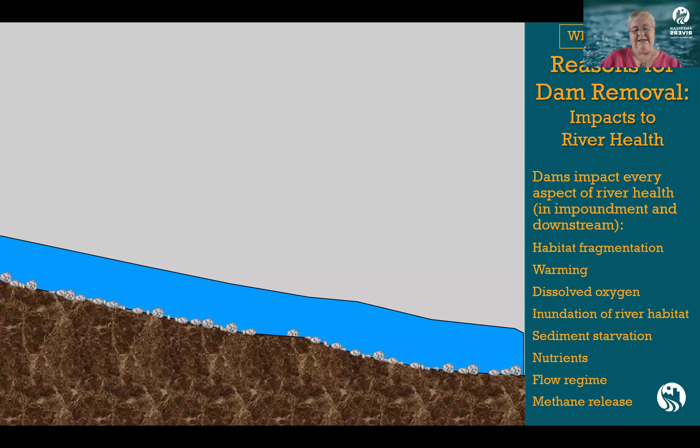But let's just say we're out in nature and everything is untouched and unspoiled. It's in pristine condition. And so we've got a river and it's got healthy substrate on the bottom and everything, natural flow. You've got seasonal variations in flow that provide the triggers for the species as needed. And there's a nice population of native fish, and they're really happy here in this watershed. And then somebody gets the big idea that they need water, so they build a low-head dam.

And low-head dams, as you know, only raise the water level. And primarily they raise the water level to flood something, either a mill race or an intake for water supply or industrial water or something along those lines. So the dam is built and now there's a barrier in the river and the fish can't move upstream. So we have a fish passage issue.

And then the fish start to notice that things are changing because it's what I call the kiddie pool effect. That water sits out in the sunshine and it doesn't have the current flowing. It's slowed down. The thermal profile changes. And so the river starts getting very warm.

And that kind of is a disadvantage for those native species. And then you get, of course, a sediment wedge that starts piling up behind that low head dam because you've interrupted the flow. And then you get invasive species that start to grow because that condition now favors that. And just want to point out this looks suspiciously like corn.

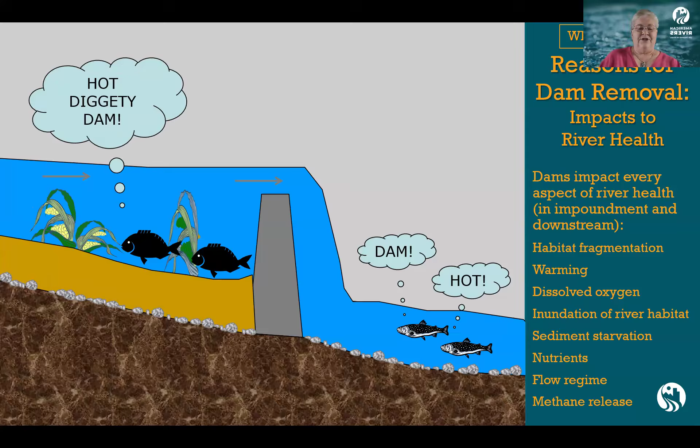And then we have invasive fish that come in, and they are super happy because what used to be a river now is an environment that favors the invasive species over the natives, excuse me. And so if you look on the right-hand side, there's an entire list of all the changes that occur in a river simply because somebody builds a low-head dam. And these are the issues that we're trying to solve as we look at removing low-head dams.

So, when we're starting to make a case for removing a dam, either with a community, a dam owner, regulatory agencies, whoever we're working with, the first thing we have to look at is fish passage. So, migratory fish, of course, we've had a lot of loss of population. So it's a problem, but also for non-migratory or what we call river resident species. And brook trout is called out here, but small-bodied fish that are freshwater mussel hosts are specifically at risk for fish passage issues at dams. And so we're finding that we're losing freshwater species at an accelerated rate, even faster than saltwater species.

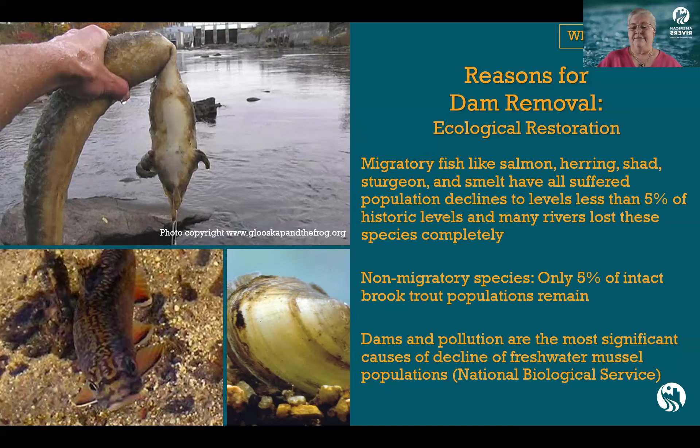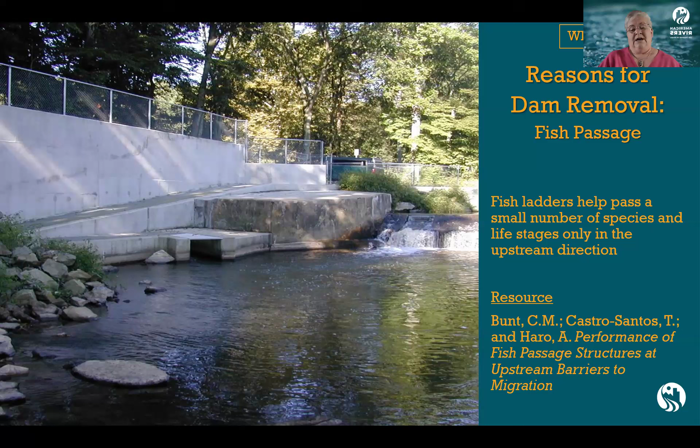So let's just solve the problem by putting a fish ladder on our dam, right? That'll take care of everything. Except fish ladders are rather expensive to build. They don't target all species and all life cycles. So they may pass adult fish, but they won't pass juvenile fish. And so far, there's been no fish ladder engineered that can pass the small-bodied fish that host freshwater mussels. There's been a lot of effort to move those fish in various countries in the world, and it's just not effective. So that's not a great solution for most species.

Now let's, oh, excuse me, I have just messed up because I'm trying to move this so I can read my slide. There we go. All right, I've got y'all moved to the other side of my screen.

So, American Rivers has found with the first removal of the Edwards Dam in 1999 on the Kennebec River in Maine that once you remove the barrier that doesn't belong there, a river can start restoring itself. And so we commonly say that there's no faster or more effective way to bring a river back to life than removing a dam. And of course, the more dams on a river that exist, if you can get 100% habitat connectivity, reconnection again, then you're in even better shape.

Another reason for removing dams is just the age of the dam. So the dams are old, they aren't serving a purpose that they were built to originally provide. I'll talk a little bit more about this in a little bit. But yeah, these dams have been around forever. They provided water to a mill, in some cases to a water supply. I see a lot of water supply dams in Pennsylvania where I work that the dams previously provided drinking water, but because of the age of the treatment works, the regulatory agency no longer allows that dam to be used. So I've been taking out old water supply dams quite a bit recently.

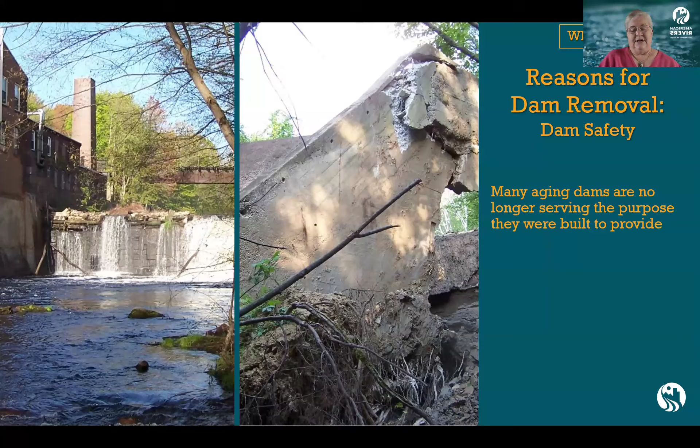We have a dam in Pennsylvania where 31 people have drowned. It's the Dock Street Dam, and Ty and I are working on helping the community understand the benefits of getting that dam out. But a lot of people don't realize that dams are dangerous. They think, oh, this is a waterfall, this is a play feature. And 1,400 people have died at low-head dams in the United States.

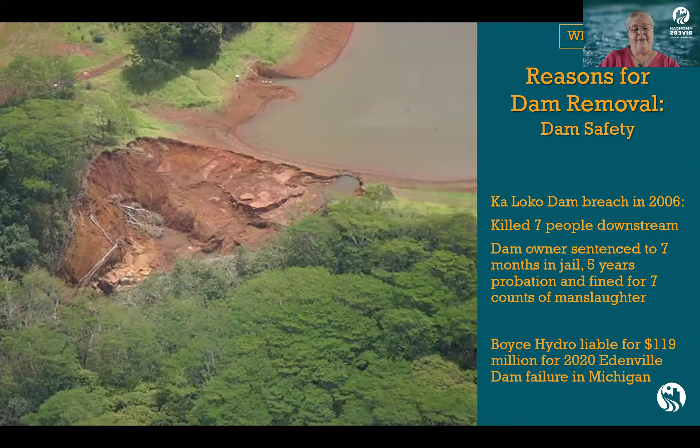Environmental justice is also another motivating factor, and by now you've all heard the story of the Klamath Dam that took more than 20 years to get four dams out in the upper part of the watershed. And the main reason was for food security and cultural values for the tribes that depended on the river. And of course, last year in 2025, teenagers from the indigenous tribes in the area paddled for the first time ever 310 miles on the Klamath River with those four dams out. So this is just a huge success story about dam removal for environmental justice.

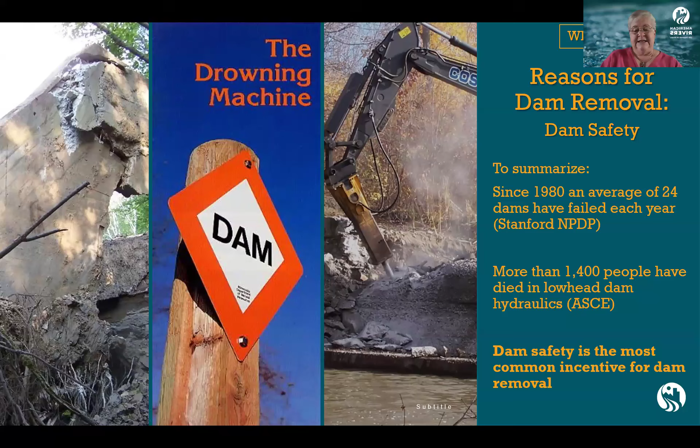So, just summarizing things, we've seen a lot of deaths at low head dams. We've had a lot of failures, an average of 24 each year. And the most common reason to get a dam out, excuse me, I apologize, the overall dam safety. If a dam is out of compliance and an owner has to make the choice between removing the dam or repairing it, that dam safety becomes the most common incentive for removing it.

So a little bit about dams in Pennsylvania. This is from aquaticbarriers.org. I just got the numbers back. We've just tallied our dam removals. We keep an interactive dam removal map on our website, americanrivers.org. Pennsylvania is the number one dam removing state in the nation. We've removed 432 dams as of 2025, and this is approaching 15% of the dams that were on the dam safety database, which we're finding out is not complete. Ty and I found a couple of dams just recently that were not in the database, so we know that there are some shortcomings in the record keeping.

So currently, that leaves us with about 2,800 dams that are remaining in the database, and of those, 75% don't meet their purpose. Only 5% of the dams that remain provide navigation or flood control. So a lot of people will say, oh, well, why would you want to take out this dam? It protects me from flooding. Well, that's not necessarily true.

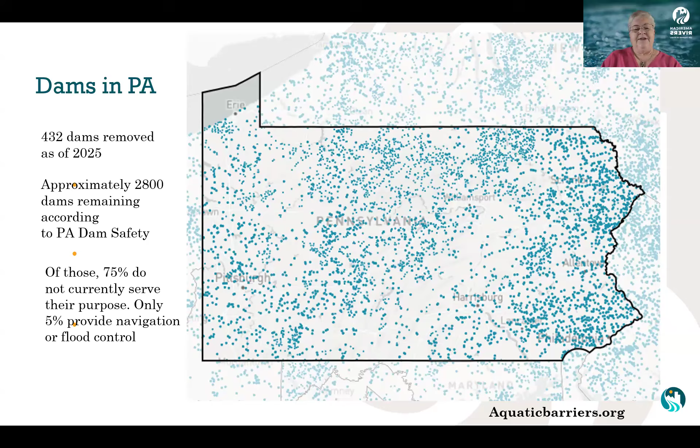And they all have a dam problem because there are dams on almost every single water trail. There are a couple of water trails that are constrained by dams. The route was actually shortened to avoid taking in an impounded reach of the river so that there wouldn't be an issue with portage or safety. So our work has provided three free-flowing water trails, total of 92 miles out of the 2,300. So the North Branch Susquehanna River Water Trail, Conowingo Creek, and the Raystown branch of the Juniata River.

Yeah, as I mentioned, nearly every water trail has dams, and Ty and I are going to be tackling that coming up soon. And in addition, nearly every water trail that has a dam, there's been an injury or a drowning that has occurred there. So safety is a big concern for Pennsylvania water trails. The state actually is doing a lot of work trying to attract people to come out and recreate in nature. And if there's a dam on that water trail, that's kind of a hazard waiting to happen.

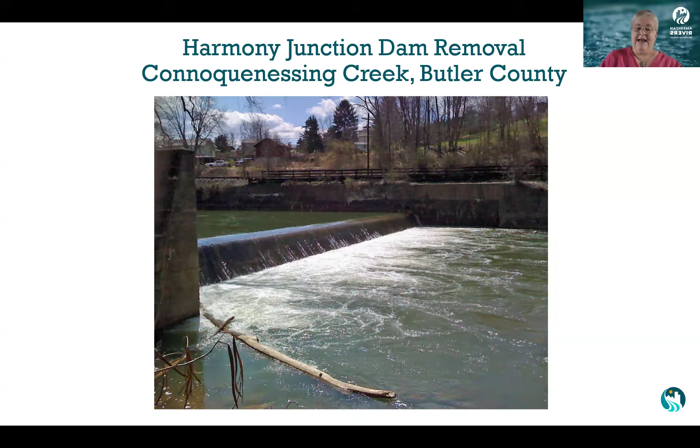So just a couple of examples of some of the dams that we've removed. Connoquenessing Creek is a little north of Pittsburgh. This is kind of an ad hoc water trail. It's not officially in the system, but it's highly used for paddling and for fishing. And this was a dam that provided electric power to the Pittsburgh Short Line Railroad back when we had trolley cars in the area. And so this dam was removed in 2009. It was the first dam removal construction that I oversaw.

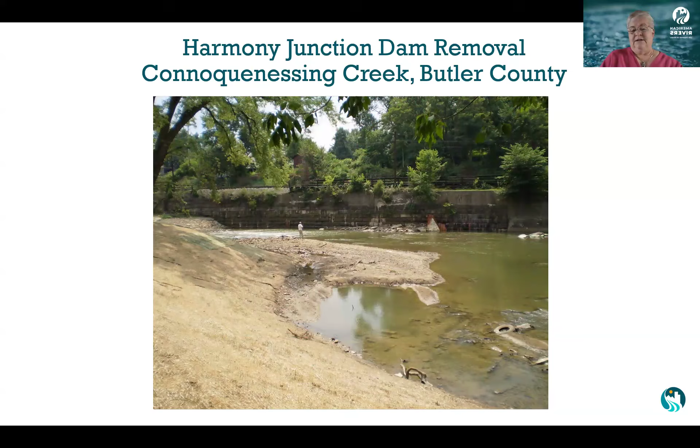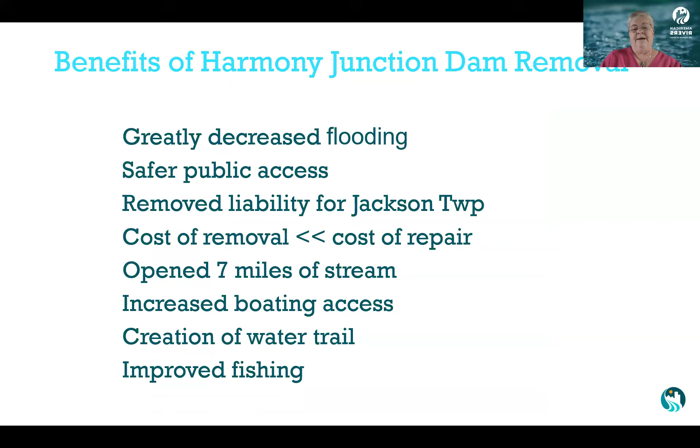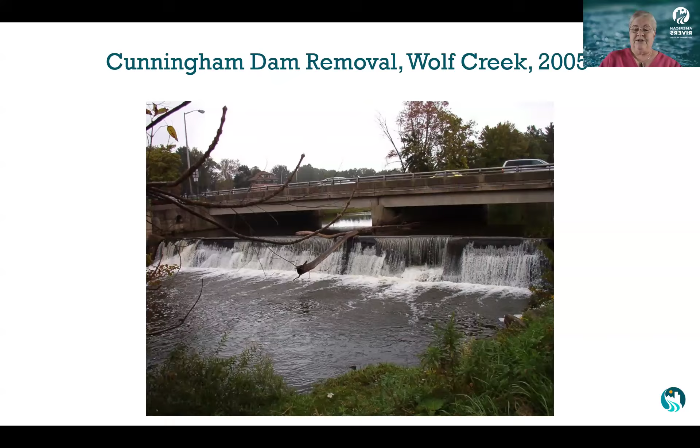And then I'm not going to read these to you, but these are the benefits of removing that dam. One of the things that I tell people when you're talking about rivers and the improvements that you make, you always provide a list of those because inevitably it's more than what people think that you get from removing a dam. And then as another quick example, this is Wolf Creek, which is also north and west of the city of Pittsburgh. And this dam was removed prior to my coming onto the staff at American Rivers. Two children had drowned at this dam, and the community was at risk of losing their liability insurance as a result. So that was the motivator for this dam coming out.

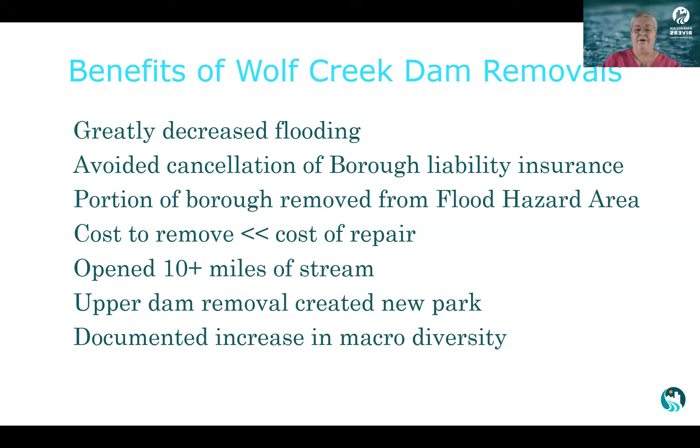Thanks, Lisa. I'll start sharing my screen. Sorry, the banner's in the way. Hold on. All right. All right, and you guys can not see the notes, right? Correct. Great. All right. Sorry, my camera turned off.

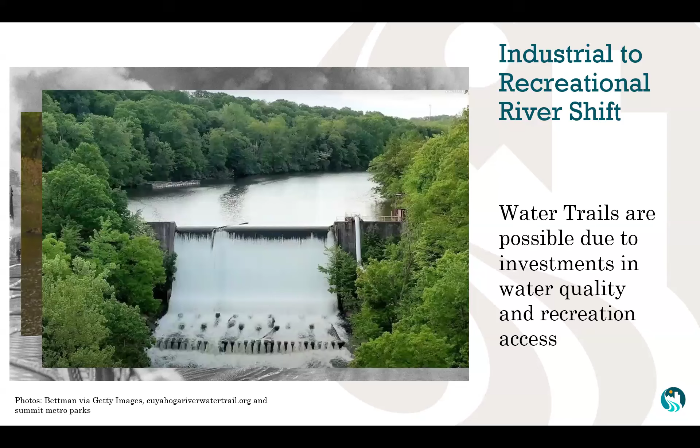Okay. So just with Lisa, I'll be talking about how to get started with dam removal and some common questions associated with that. Before I really get started with that, though, I want to acknowledge how we got to water trails in the first place. We've all seen pictures of the Cuyahoga and other rivers catching fire before more stringent and much needed environmental regulations were passed. And it's really a remarkable turnaround that a river could go from one that repeatedly caught on fire to one that is now a water trail and shows how much rivers can recover when given a chance to. And as a water trail, the Cuyahoga is now a place that the community actively promotes and invites folks to come recreate and enjoy the public resource. So here's the Cuyahoga now, and now they're in the process of removing the Gorge Dam, one in a series of dams that has been removed on the Cuyahoga.

And Lisa just reviewed all of the reasons that this is problematic, not the least of which is boater safety on a river we are promoting as a water trail and promoting people to come use. And tragically, at least 50 people have died on dams or at dams on water trails in Pennsylvania. So this is a real problem here.

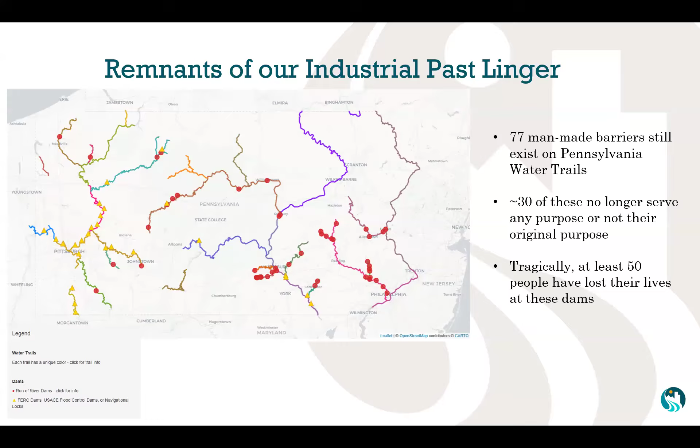Luckily, as you might have guessed, there's a solution to these ecological and safety issues. We can remove these dams. And the practice of dam removal that was once unheard of is now becoming more common, and techniques and practices more honed. At American Rivers, we imagine a future where our water trails are free-flowing and safe for everyone. And I want to take a moment for everyone to imagine their favorite water trail, free of barriers, and what that would look like and mean for your communities.

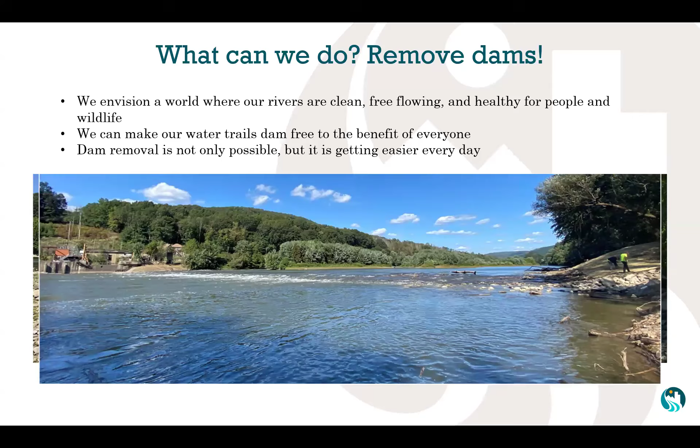And this is the Susquehanna River. This is the Oakland Dam removal that Lisa helped with a lot a few years ago. So these old dams come in various sizes and constructions, which makes every removal project unique. This is the Dock Street Dam in Harrisburg, Pennsylvania. This is the deadliest low-head dam in the country by number of fatalities.

This dam was built to cover up sewage outflow pipes from Harrisburg when we were still dumping a lot of raw sewage into our rivers. So now it's just there as a low-head dam on the river, and it's not serving its original purpose. And obviously, this would be a huge project and a huge removal process if we were to take out this dam.

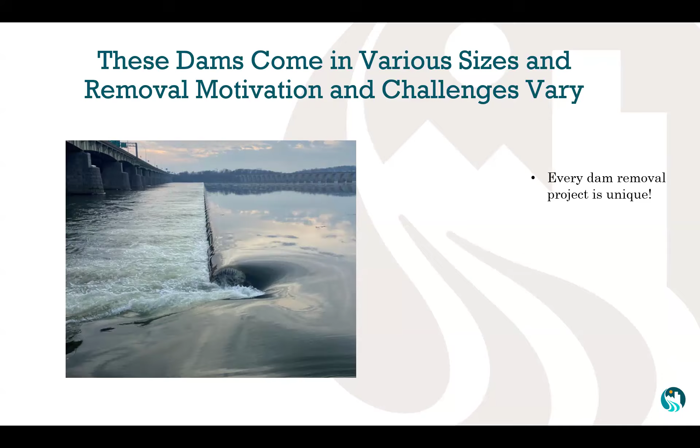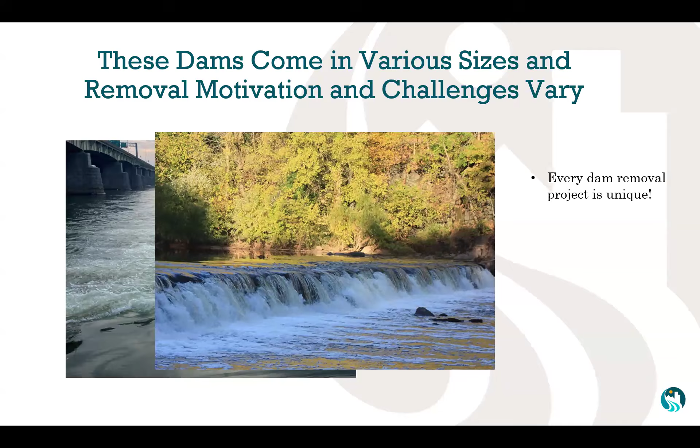This is the Indian Head Dam on the Perkiomen Creek. This is the dam that Lisa was referring to earlier, that the water trail had to be shortened because of this dam, because there's no portage around it, and obviously it's a much smaller dam, it would be a little bit easier to remove, but present different difficulties.

And here's another dam on the Yellow Breeches Creek Water Trail in Pennsylvania. This is a diversion dam, which is diverting water to another old mill dam. And the owner is interested in removing these dams, but he's concerned that if you remove one, it might dewater the other channel. So these are all different concerns for each dam removal project, and each project is going to be different and present different hurdles and challenges.

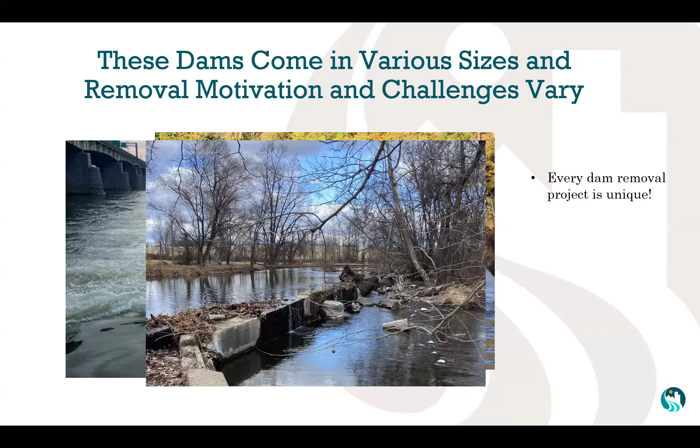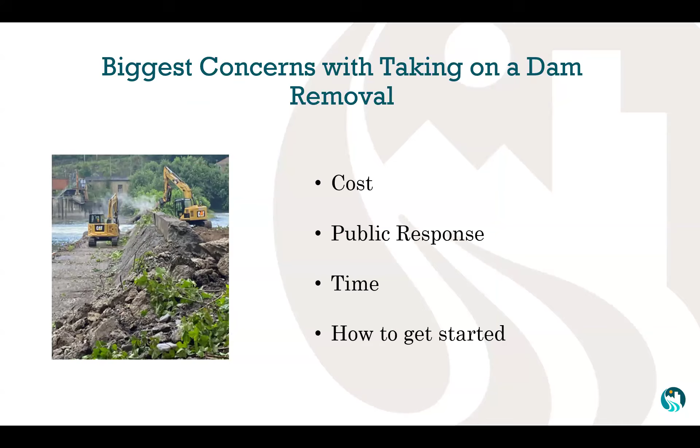Since in the time we have today I don't have time to cover all the steps in detail of a dam removal project, I want to touch on a few things that may make people feel intimidated to start one. This being cost, the public response, or dealing with the public, the time investment, and the first steps in how to get started on a dam removal project.

So in terms of cost, 3 points of good news on this front. Firstly, dam removal is almost always cheaper than the cost of repairing the dam or the cumulative cost of continually repairing the dam over time. And it is usually a small fraction of the cost. It's also a one-time expense. So you spend the money to remove the dam, and then obviously you don't have to maintain a structure that's not there anymore.

Secondly, there are often funding sources to tap into to help fund dam removal that are not available for the repair of a dam. So even if you're looking at similar costs between removal and repair, the removal can end up being maybe free because of funding opportunities for dam removal. And thirdly, dam removal funding can sometimes bring funding along with it to fund surrounding projects such as park improvements, boat launches, and floodplain projects. So it really can have an expanding impact besides just the removal of the dam.

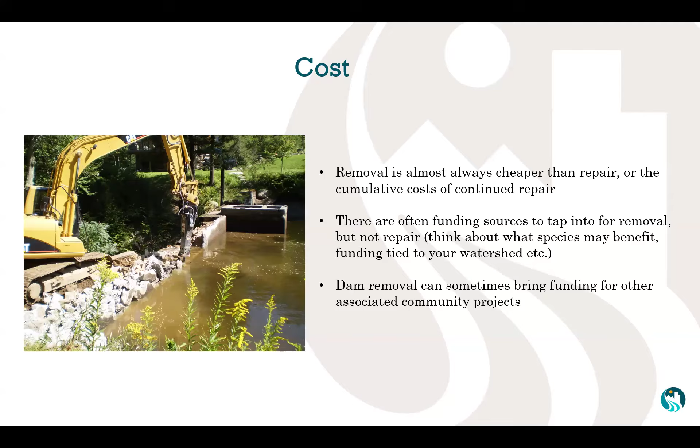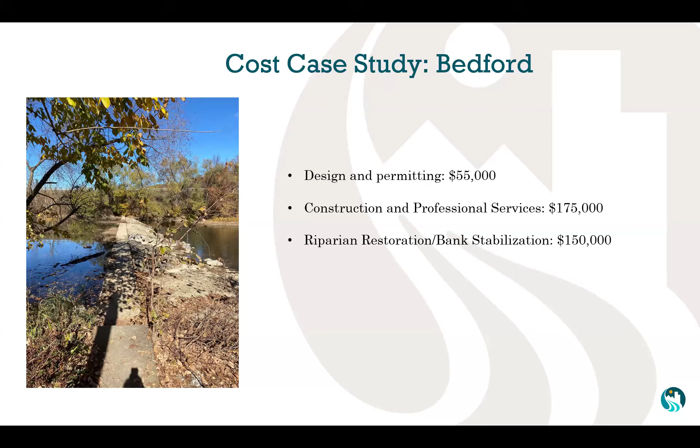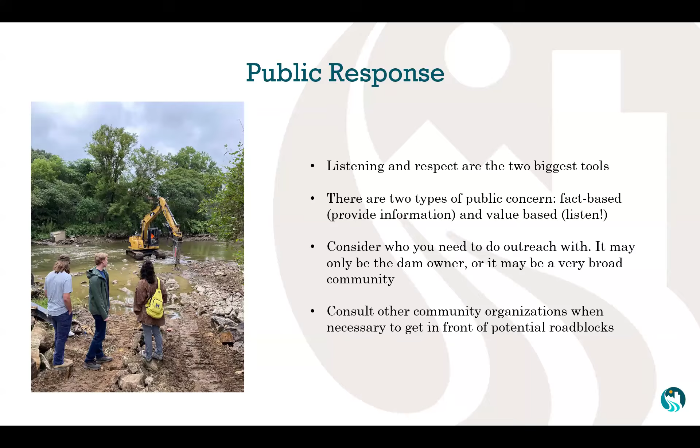That said, it's important to think about who you need to consult and do outreach with on a dam removal project. If it's a dam off in the woods with one private owner and no public visibility, you may not need to do a huge, big public engagement campaign. But if it's a very visible public project, it's important to consult other community organizations and representatives from different groups that may be impacted to get their perspective and concerns, even if they're opposed to dam removal.

So I have two case studies here. First is the Brandtsville dam removal that American Rivers just did this past winter. This is on Yellow Breeches Creek Water Trail. And even though this is a relatively small derelict dam, the process ended up being really long because when this project was first identified, the owners were not on board with removal. So we had to wait over a decade for new owners to be interested in dam removal.

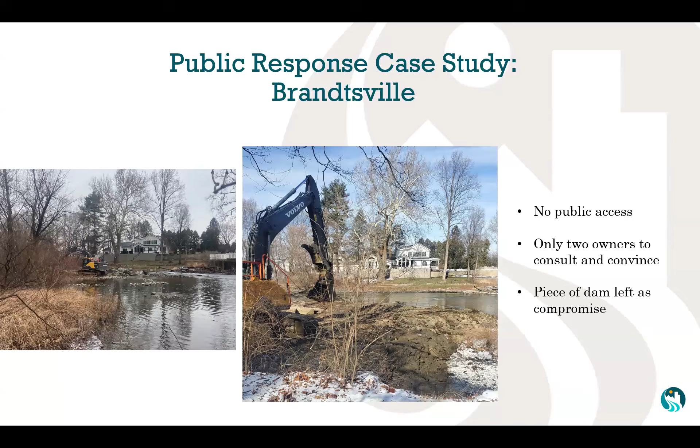And so both sides of the dam were on private property, and in that sense, kind of the dam had two owners. And for this project, you can kind of see it in the corner of the picture on the right. A piece of the dam abutment was left in place at the request of one of the owners, and so this is an example of how certain compromises or consultations with owners have to be met sometimes to get a project finished.

On the other hand, the Dock Street Dam, which I mentioned before, is a huge dam and right in the center of the capital of Pennsylvania. And so if we were to do a dam removal project with Dock Street, we would consult many community organizations before the project started to get a sense of where concern was and how we could address those before the project got started.

And it's really important to identify benefits and help community members and people around the dam to imagine not what they're losing from dam removal, but what they could gain. You're usually gaining land when the water level is reduced. So maybe there's more boat access, maybe there's more parks that come with the dam removal.

So in terms of time commitment and support, usually a dam removal project has a project manager who fills many different roles, from dam and owner liaison to developing the team and hiring consultants. But also, every project is a collaboration with many partners. Maybe your river is near some American Rivers people and they could help with the project. Or, we always partner with local conservation groups.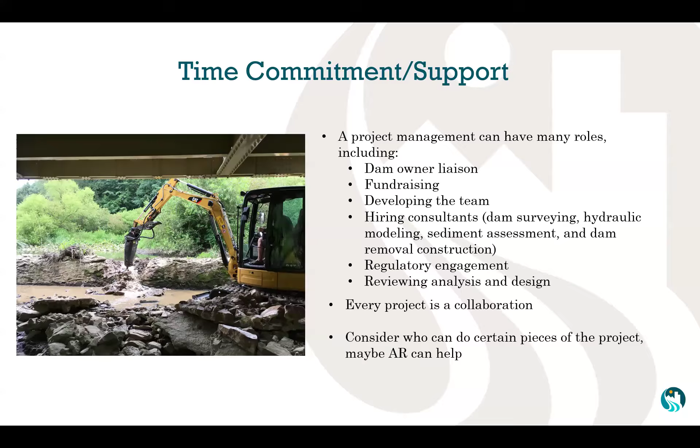Lastly, now that you know a little bit more about dam removal, I'd like to talk about the first steps and how you can learn more. So there's a national inventory of dams, which has a map and database, but also aquaticbarriers.org is much more comprehensive with a lot of smaller barriers. And that also has a prioritization tool.

Also, ownership can be investigated on county parcel maps. Most counties have a GIS map that you can access to look at who owns parcels on the map. And also you can oftentimes request files on dams from a state dam safety office. And this can tell you a lot about how the dam was built, its history of violation, any notice of violations, and correspondence with the owners.

So by requesting records from public offices, you can learn things that would help you in figuring out if this dam is worth removing, or I shouldn't say worth removing, but easy to remove. What would be your hurdles?

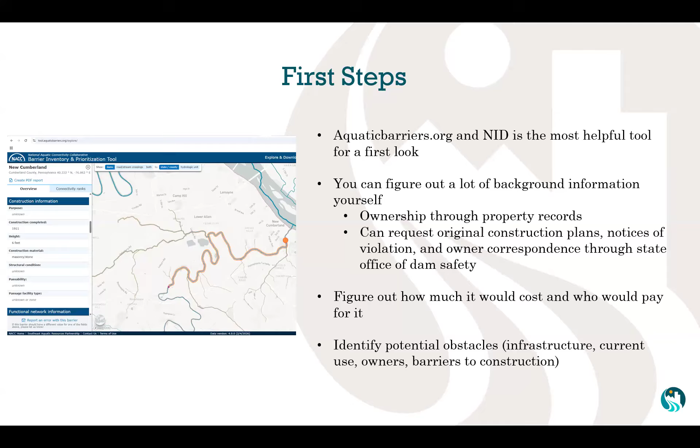Also, I want to promote that American Rivers has free dam removal trainings that are hosted in different regions at different times, multiple times during the year, for people interested in becoming project managers on dam removals. And there's also lots of resources that we can send out after this presentation on how to get started and what your tools are.

So lastly, I'd like to return to our dam from earlier, the Oakland Dam. This was a huge dam, and many felt like it was never going anywhere. But every dam is temporary, and it took people imagining a different, safer, and more vibrant future for their water trail to get this dam out. And it was possible, and it was removed. So I want everyone to feel like this is a possibility. This is something we can do, and we can do together.